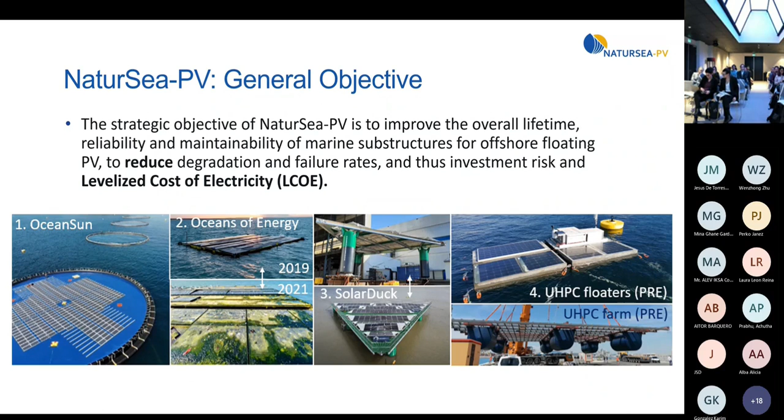And how are we going to do that? For that substructure, we rely on ultra high performance concrete because it has very good performance in terms of elasticity compared to regular concrete, in terms of durability, and also in terms of strength. It's a great material, but in this project we want to make it more ecological, reducing its carbon footprint, and if possible, also cheaper. Apart from that, we are going to work on the development of bio-based coatings to protect not just the concrete, but also the materials in the whole PV facility from fouling and corrosion. Not all the parts can be made of concrete, of course. Our colleague Esteban from RDC will give you more details about this in a few minutes.

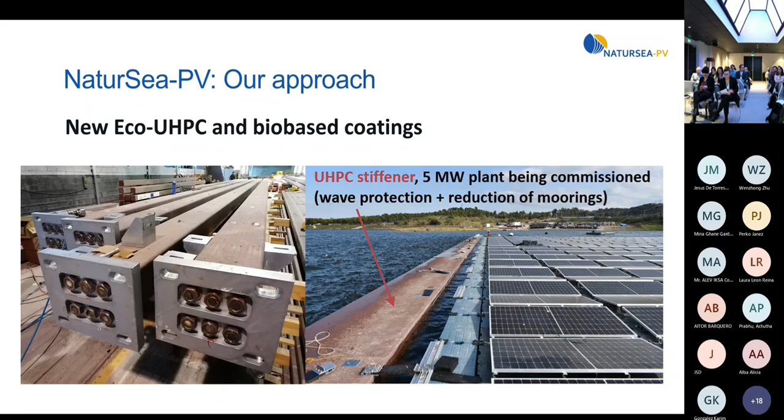Apart from that, we want to develop new predictive computational methods to predict the durability and the performance of the material and the whole structure under those harsh conditions. We will develop a mesoscale model that allows us to predict how chloride ingress will take place in this kind of materials. In the case of ultra high performance concrete, this is not known. So our colleague from Darmstadt will give more details.

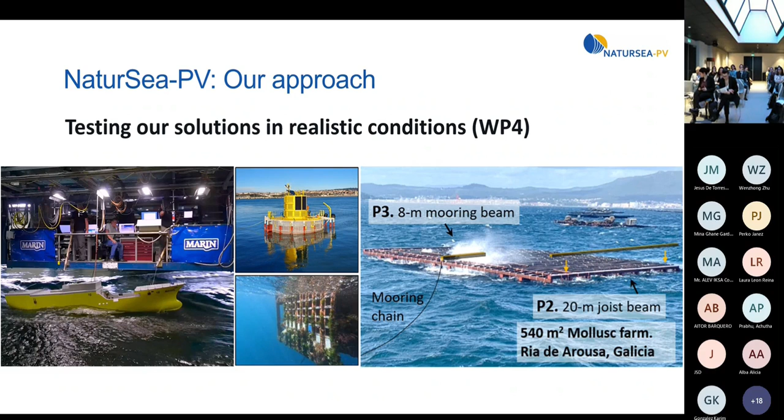And then, of course, it's very important to test all these solutions in realistic conditions. We cannot make the whole structure for real and put it in the sea. So we will test it, as you can see, in the facility of MARIN, that nice wave tank. Part of the materials will be tested in the sea, in the HarshLab. This yellow structure in the middle is placed on the coast in the Basque Country. It's a facility of Tecnalia. And of course, complete elements, the beams and the floaters, will also be tested in realistic conditions in the sea. The beams in Galicia and the floaters in the Basque Country.

But apart from those technical developments, it's also very important to assess the impact that all these solutions can have on the environment, on the socioeconomic activities that take place in the sea and so on. Because, of course, we all want green and cheap electricity. But probably none of us wants to have one of those facilities just in front of your favorite beach or something like that, or your fishing area. So how can we handle that?

Well, our colleagues from the University of Cork will work with different groups. This event, this co-creation event, also pursues dealing with those kinds of issues. And that's why we try to involve many people to participate in this event so that they can provide their opinion. Maybe these solutions are only for very specific locations. Maybe we should change our design somehow. So all that has to be assessed. Also, of course, the regulatory constraints. Do current regulations encourage or facilitate the development of this kind of structures, or do they hinder it? Our colleagues from Cork will study that and will give you more information in a few minutes.

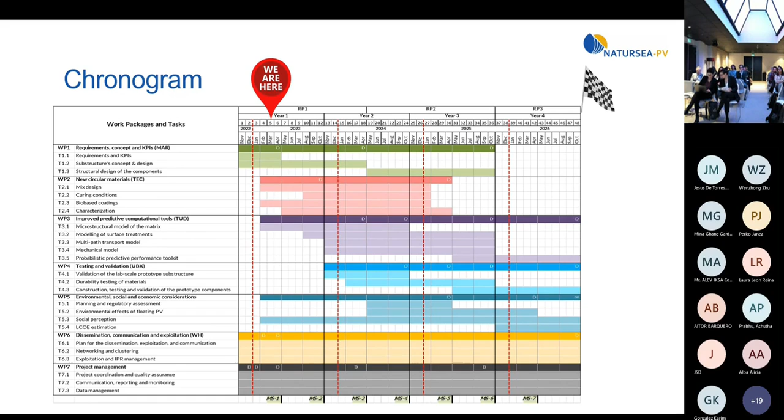And well, for doing all that, we have our NaturSea project. This project just began a few months ago in November, and it will last for 4 years. So we have plenty of work ahead, but we also have some time. I have to say that we have a great team composed of 11 institutions from 7 different countries. We have one additional institution from Portugal that will join us in a few weeks. We are signing the papers now. So I think that the project is very nice. We are going to get very interesting results and hopefully change a little bit Europe and the future of green energies in general. So I hope you all enjoy this event. This is everything from my side.

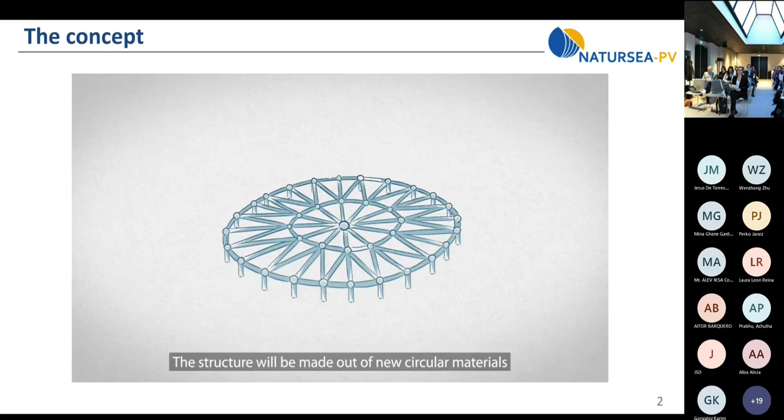In reality, they can become like 2 meters in diameter and they can carry a baby. You all have seen those lovely pictures, I guess. If you turn that upside down, then you see that it's actually composed out of girders. And these girders, they span a sheet. And well, what do you want to have if you design a floating solar plant? Basically, you want to span a lot of square meters or hectares with the least amount of materials. I think that is one of the main design drivers, creating hectares with the least amount of materials.

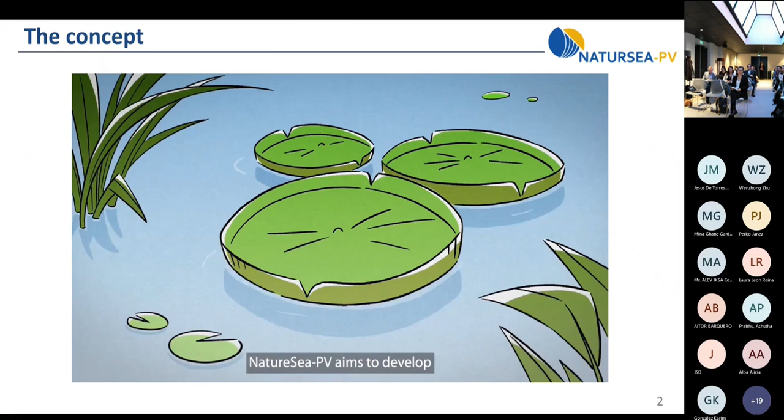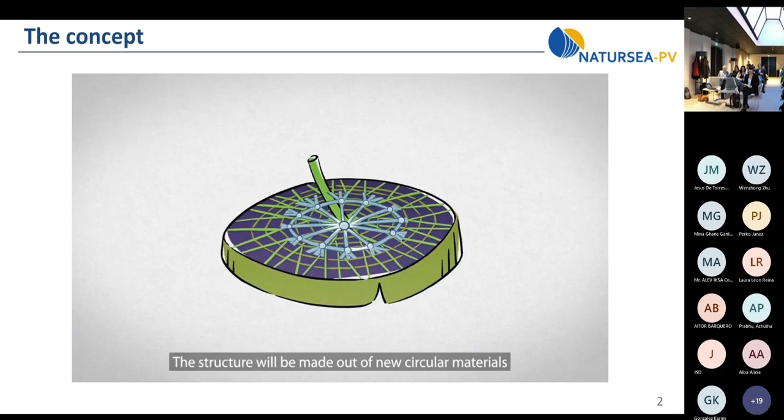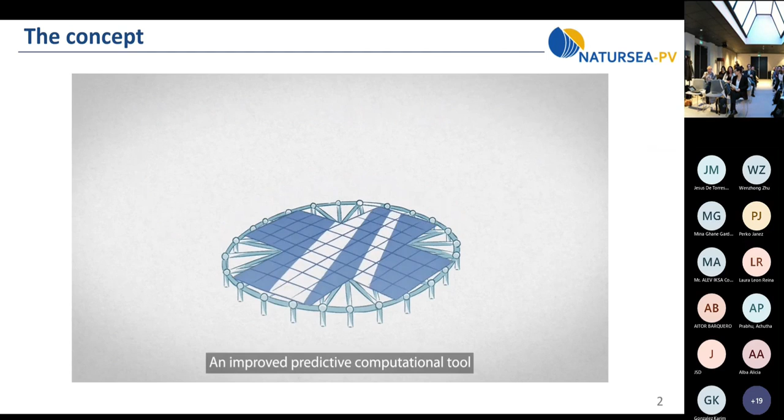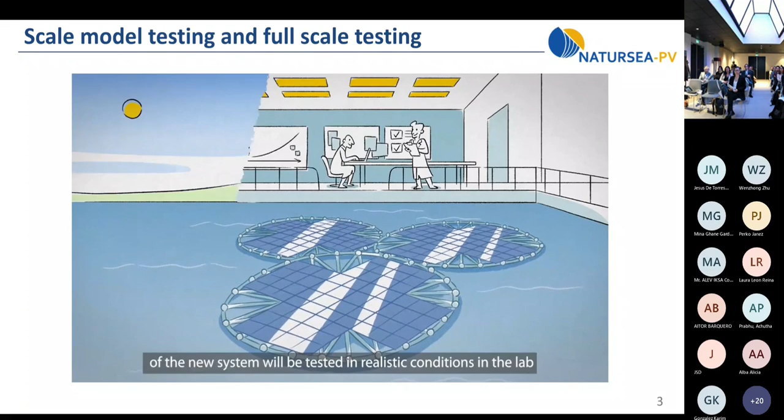And we were looking at how does nature do this. And these water lilies actually do that. Darwin made them such that they get as much sun as they can with their sheet using the least amount of girders possible. So that is basically the starting point of our concept. And then what we will be doing is first designing that with our numerical tools, and then later on test that at model scale in one of our model scale laboratories, and then also test part of it outside at sea.

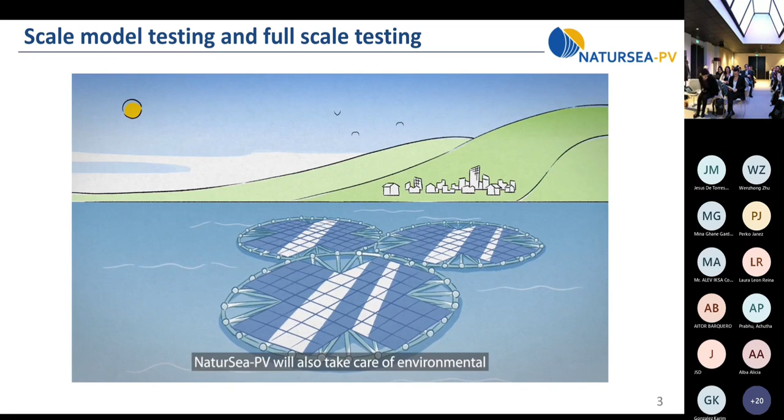So the design, the concept is completely new, and therefore it is at really low TRL at the moment. And in the next 3 years, we try to bring that a bit further on the TRL ladder. So here, this picture is just a starting point. So this is not the end design, but this is what we take from here and then analyze it and develop it further.

So the Lily concept consists of radial and tangential girders. And we anticipate to make these girders out of lightweight concrete, eco-friendly concrete, flexible concrete, ultra high performance concrete. So just like the water lily flexes with the water surface, this structure is also meant to flex with the waves. Flexible concrete elements. So these girders provide support to a lightweight sheet which spans the construction like an umbrella. And this sheet is still to be designed. So you have to see this as a low TRL starting point, which we will bring further. But yeah, it's a lightweight deck on top of a flexible concrete girder structure.

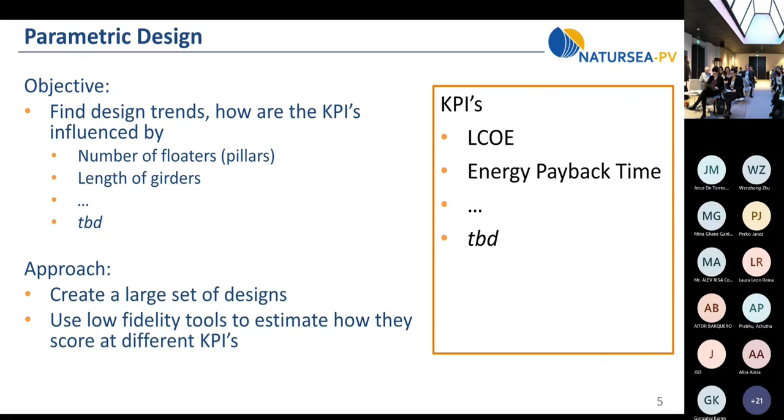So the approach is that we will create a large set of design variations, use low fidelity tools to estimate how they score at different KPIs, and then from there converge towards a solution, and on the way, of course, switch to higher fidelity tools, making better assessments. And in the end, we end up with the most high fidelity tool we have, which is the model test basin. So to make this a bit more concrete, not material concrete, but this is like a systematic design variation.

This is like a top view. Here we vary the amount of floaters and with it the amount of girders. You can make it having one outer circle or two or three. So here I call it rings and slices, which can have many varieties. And these are all design choices. And what we want to assess is the impact of these design choices on the durability, on stress levels, on the LCOE, and on the other KPIs that we have defined.

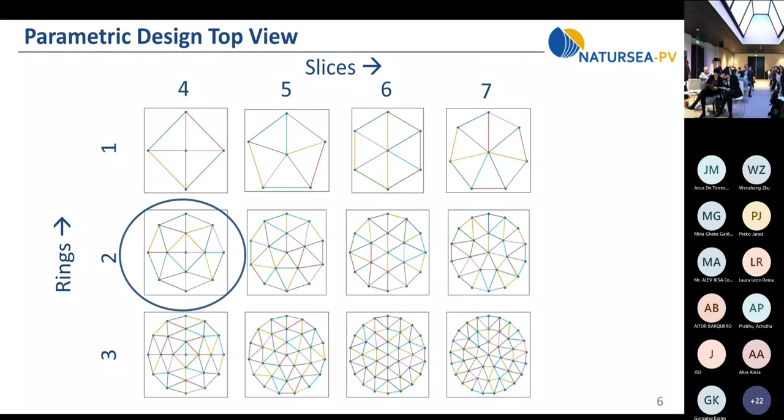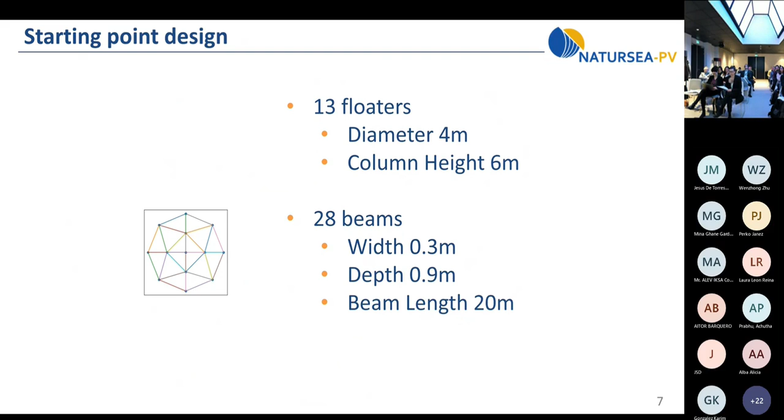This one will be our starting point of the design: 13 floaters, having a diameter of 4 meters and a height of 6 meters, of which about half will be below the water and the other half above the water. 28 beams standing on top of these columns, beams with a certain cross section and a certain length. That's the starting point. From there we will vary further and see how we can make this flexible, durable, and scoring well on our KPIs.

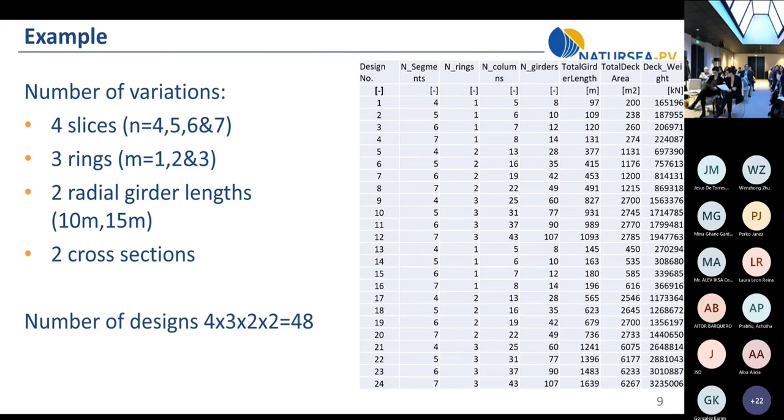We are going to vary a lot of parameters and see the effect of it. It's quite easy to end up with a large set of designs, and we are going to assess them all using low fidelity tools and then look for design trends and then switch to high fidelity.

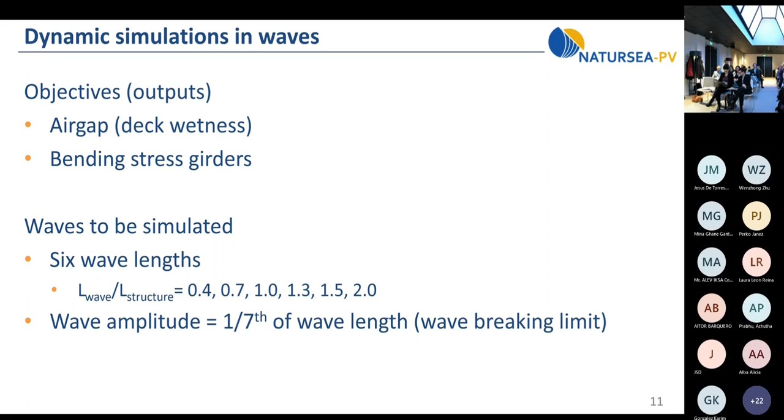So we will do this analysis using simulations. It will be dynamic simulations. We will define an LCOE function for all these designs, so calculating the cost of it, and also estimating all the other KPIs for all the designs we have. So there are a lot of calculations. They need to be simplified a bit because otherwise it's infeasible to assess many designs, but it's really meant as a screening. And at the point when we really make decisions, then it's time to look into it in more detail.

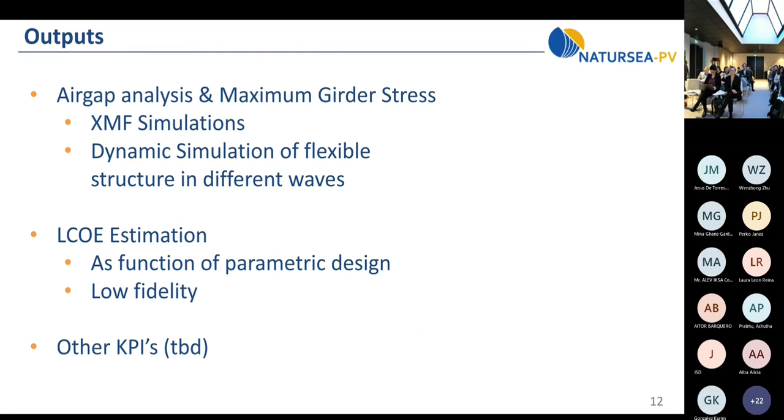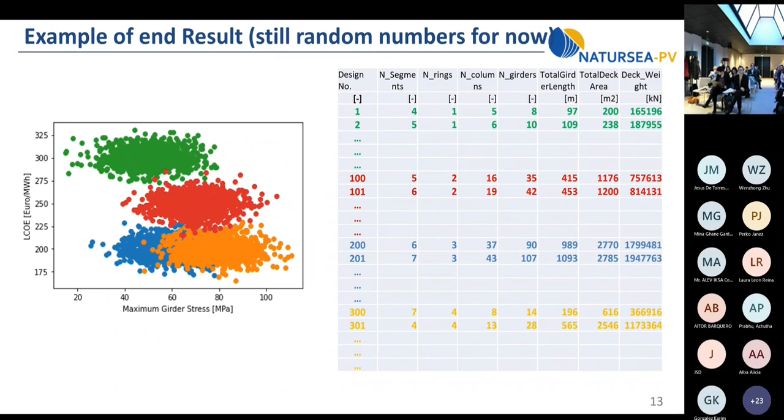And then really look for each design: okay, what is the LCOE, plotted here on the vertical axis? What will be the maximum girder stress due to the waves? And then really look at what is the best design, as a compromise needs to be sought between different KPIs. That is, in really short, the concept of NaturSea-PV.

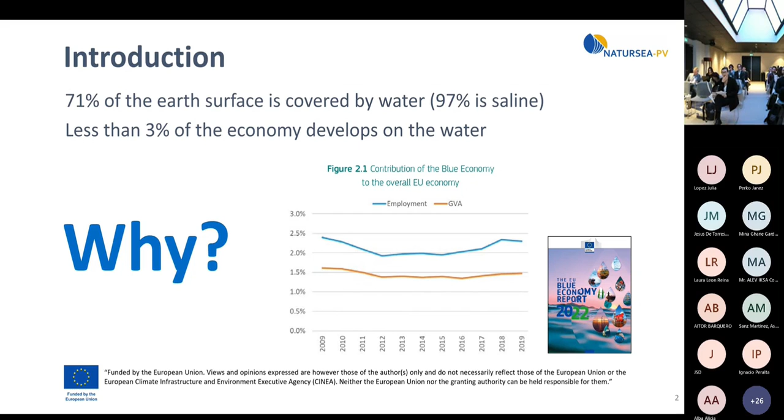The economy that develops on the water, or maybe on the ocean. And it is, well, maybe it's working, but we really didn't notice a significant increase. And one of the main reasons, at least from my point of view, is the harsh environment of the ocean. As it was already told here, the ocean water has chlorides, dynamic loads, fatigue with more than a million cycles per year, abrasion of the water and the elements in the water against the structures, extreme temperatures. Also, in many oceans we have less than 0 degrees, and also a costly and hard maintenance.

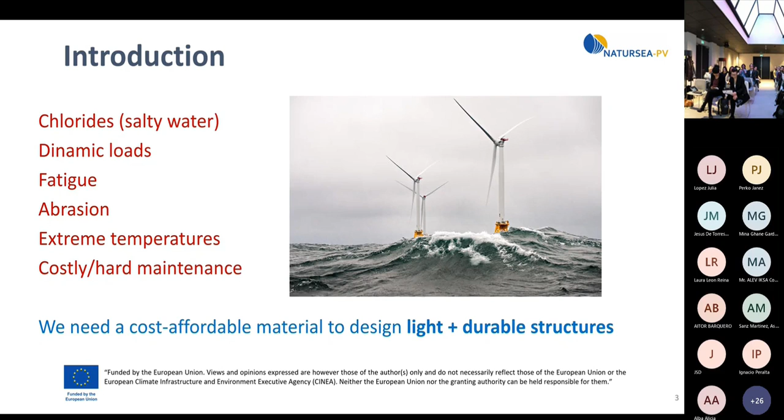So, in general, it's a key for the development of the blue economy to have lighter materials and more durable materials. Lighter because it costs a lot of money to bring the structures 10 miles or 20 or 50 miles from the coast. This means money. And more durable because we don't want to send people to do these expensive and risky activities of maintaining these structures. So having a lighter and durable structure and material is a key, but also to have a cost-affordable material, because the more expensive and the more technological the material is, the more difficult will be the development of this economy.

Up to now, one of the most promising materials we have experienced is ultra high performance concrete. This is a type of concrete which has a higher performance, not only higher strength, but higher performance in a wide sense. In the case of the sea, the most relevant is not that it has more compressive strength or flexural strength, but mainly the durability. The durability in uncracked state, which comes basically from the low water binder ratio and the high capacity of the binders, but also the durability in cracked state, because the fiber content is so high that when the material is cracking, you don't experience a large crack where the chlorides, the water and the oxygen will penetrate, but many micro cracks that are really more durable than a single macro crack.

Well, UHPC is a combination.

The laser doesn't work, but whatever.

It's a combination of 3 technologies of concrete developed in the last decades, which are, the laser, don't worry, okay, which are self-compacting concrete, fiber reinforced concrete, and high strength concrete. The combination of all these is UHPC, a technology that is really very wide depending on where you focus.

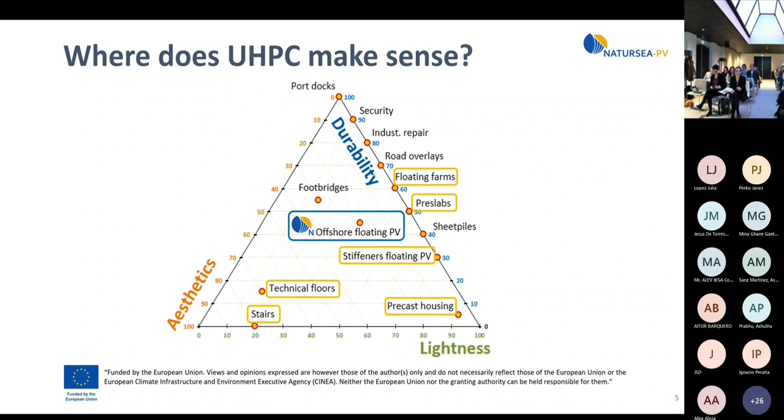Why? Because as I already said, a lighter structure is easier to make float. It's more economic to make it float, but it's also more durable. Most of these structures we have already made and installed in different situations. As you can see here, these are examples of successful structures made with UHPC, our design, and we also produce them. The first one and the last one are also patented solutions.

So if you want, we can start from this one. These are floating farms made of UHPC. We have already more than 30,000 square meters of these, and the maximum wave height of these structures is approximately 4 meters. Here, the key is that we are replacing the typical solutions that are made of wood. Wood is flexible, but the maintenance costs are very high. So our solution is a little bit more expensive from the first day, but very soon, after 5 or 6 years, it's already more economic due to the savings. This structure is exactly as flexible as a wooden structure.

If we go to the left structure, in this case, this is a perimetral pontoon made of UHPC to protect a floating solar system, which is composed of plastic floaters. In this case, the solution is competitive simply because the alternative with ordinary concrete is 4 times heavier. So 4 times more transportation, 4 times more cranes, and so on. So this was the most economic solution.

And in the central one, you can see some kind of nutshell, a 6 centimeter shell that is a pre-slab that later is filled with ordinary concrete. So this is an economic way to guarantee 100 years of durability in a port only with 6 centimeters of material. And later we put inside ordinary concrete that doesn't have these durability requirements because we already guarantee everything with a light structure that is really easy to commission. So here in the central one, the commissioning costs, the installing costs are much lower than other alternatives. And we have installed these because these are the most economic solutions from the first day or after 5 or 6 years.

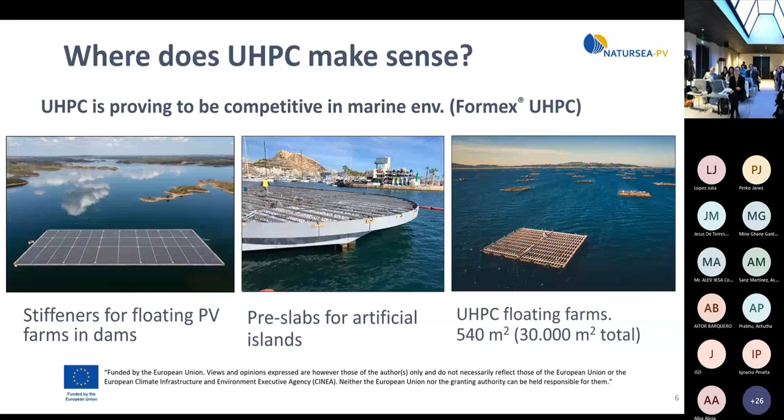Despite this technology and developments, there are still many challenges and limitations. I generally say that UHPC is like ginger because we all know that it's very good, but we don't know how to use it or where to use it. As I was telling, I think that the main barrier is that engineers really do not know in which field to use it. And also many clients don't know that they are potential clients. They need UHPC, but they don't know it. So as they don't know it, they don't call us. So this is the problem. We need to shape the market with projects like NaturSea, to show people that UHPC can really be used in some sectors where no one imagined that.

One of the main keys is that the material is expensive. Okay, expensive is a relative word. It's expensive if you make the same designs, but if you optimize the element to understand that you can use less material and transport less material, then costs are relative. The regulatory frame is still a significant barrier because we don't have so many norms yet in the countries, and the lack of success case stories. But it's true that every day we have more examples of successful uses of UHPC.

Well, we are facing many of these barriers and limitations with the NaturSea project. I will not speak about the Lily because they already explained a lot. But the thing is that in this project, we will design a large substructure of UHPC, and at the same time optimize the costs of UHPC and its sustainability. And these two tasks are really related because the design of the structure is directly related to the capacity and properties of the material. We still don't know if the most sustainable solution is a UHPC with a high carbon footprint but using a low amount, or a combination of a weaker UHPC using more material. This is the main analysis in work package 1 and work package 2.

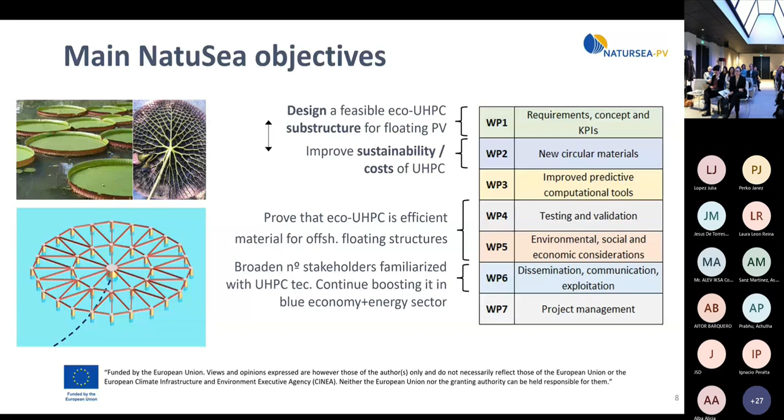In work package 4 and 5, we will prove that these structures in TRL 4 and 5 are really working after 12 or 18 months. We will prove if these structures are really useful to our goals. And in work package 6, we will do something that I think we are missing nowadays, which is to broaden the number of stakeholders, the people that really know what is being done with UHPC. We need to shape this market for future sales.

So as I was telling, there are tasks in this project specifically focused on UHPC, which are to develop an eco-UHPC using eco-cements, recycled fibers, recycled aggregates possibly, and also focusing on the concept of circularity. We will also explore in our factory a new curing system to boost these properties of the eco-UHPC.

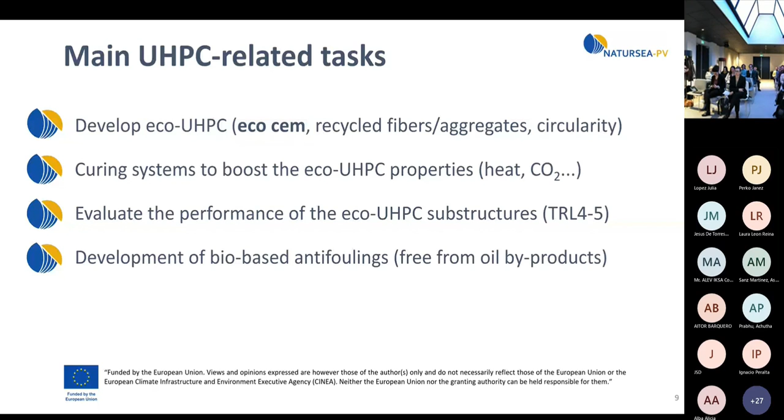We will evaluate, as I already told, the performance of eco-UHPC at TRL 4 or 5 with elements such as these rings and floaters that Otto mentioned. And we will develop bio-based antifoulants to protect these structures from fouling. And this is mainly the presentation I wanted to do. If you have questions.

So I just want to check the question that was asked before, because I think that you can answer. Okay, there are two questions. So the first one by Mr. Alev Iksa. Oh, okay, another one. Okay, sorry, one moment. Lots of questions. We are very happy about it.

Okay, so the first one: what is the unit weight of the concrete? As it is a UHPC, what is the strength target for your concrete? And what sort of reinforcement is used in the concrete? Well, all these questions are relative. UHPCs can have binder contents between 500 and 1,000 kilos per cubic meter. Please don't move because I am reading the questions. So it's relative. Obviously, it's higher than in a traditional concrete, but you are using lower volumes of material and they last long.

The strength target of our concrete. In our case, as I already mentioned, I don't know how much we can afford to decrease the performance of the concrete, because this depends on the equilibrium with sustainability. Nowadays, the UHPC we produce has 160, 165 megapascals on average after 28 days and without steam curing. The reinforcement used: normally all these structures are pre-stressed or post-tensioned, but normally pre-stressed. The next question, I think, is the same.

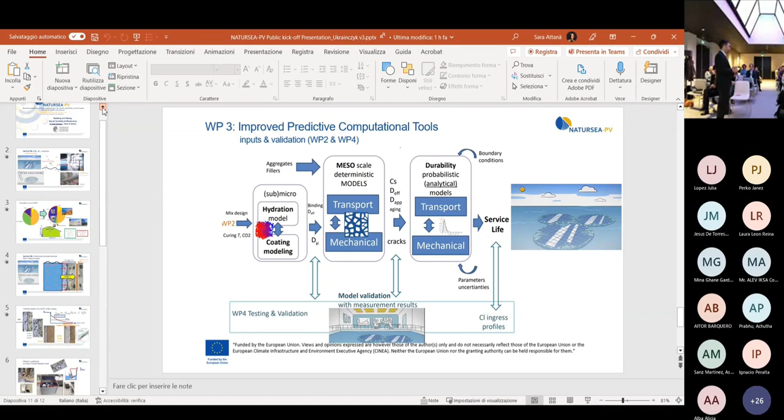Interesting. Sorry, because I don't know if from home they are listening. So I come here with the microphone. Do you want to? Yeah. Okay. Nadia, you're Nadia, right?

Yeah. Nadia asked if the beams are 40 meters long. No, we don't know the length of the beams. I'm explaining what's the maximum length that we more or less can afford in our precast factory. So if we go beyond, we know that we need to produce the element in the port or next to the port, which means a totally different logistic. 40 meters is okay because with two beams you could span 80 meters, which is more or less the first design.

Many thanks, Esteban. Now I give the floor to the Technical University of Darmstadt. Our project partner is Neven Ukrainczyk. I hope that I spell your name and surname in the right way. So he will talk about modeling and testing, and so about durability and maintenance. So Neven, the stage is yours. Yeah, thank you.

Yeah, I have the task to talk about the modeling and testing. So it's part of work package 3, predictive modeling tool. And our group is leading this work package, and it's chaired by Professor Koenders. I also got inspired by a very nice video. Thank you for this. So this is our dream. I also believe that UHPC is the right material for this kind of application.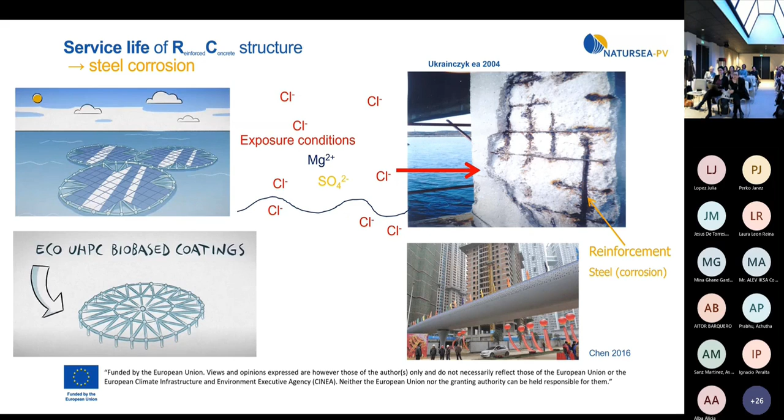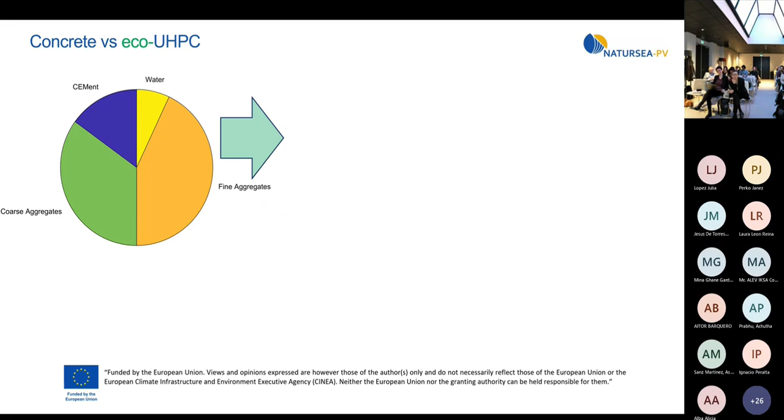Here is one example that UHPC is already really reality. Maybe a nicer picture from Esteban I would use next time. But the Chinese are also ahead in UHPC applications. And we heard that our challenge is actually not only UHPC, but also to make eco UHPC. Because here you can see normal concrete, but when you compare it to UHPC, we don't have the coarse aggregates, and as Esteban just told, most of the volume, here I show it by mass, most of the amount is fine aggregates.

So this is also an idea in the proposal, that in the project we actually replace the aggregates, so we can use recycled fine aggregates, and the next step is the cement, to make eco-cement, because the cement has the highest CO2 production. So we really need to reduce the CO2 footprint from the binder, and this is of course done by supplementary cementitious materials. So we will explore different supplementary cementitious materials, and then we have fiber and a lot of superplasticizers to make it flowable.

And here you can see this is really increasing the footprint of the UHPC, also the price, the CO2 footprint, because we have a lot of cement. But as Esteban told you, because we use less concrete, the bars will be thinner. This is one argument that this is still a more sustainable solution, which needs to be checked by LCA, of course. But another very important argument is that the durability is increased, and you have less maintenance costs, you don't need to replace covers or do maintenance even in 15 to 20 years.

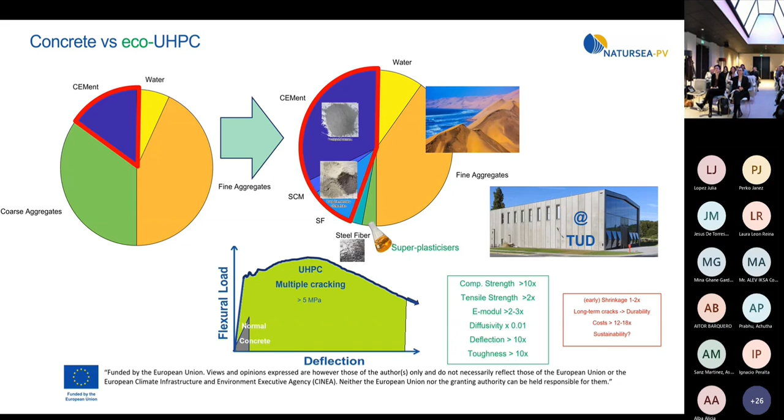Another drawback is early age shrinkage and also the cost, which we heard, but of course, if this is adjustable, then the costs should not be a problem. We also heard that from Esteban.

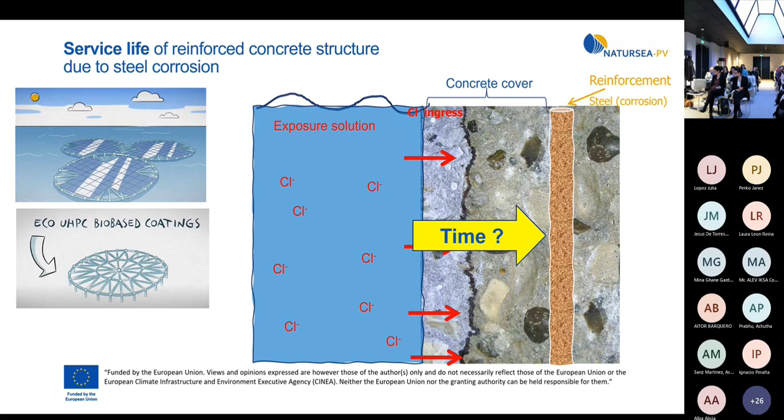So now I will talk about why chloride ingress. This is the cross section and we have a rebar here. These are the chlorides, they diffuse or ingress. There are more mechanisms involved. So this is the concrete cover, which is the main cover responsible for the durability, that passivates the steel, because concrete has a high pH and this passivates the steel. But here you can see the chlorides. If you spray it with silver, then you nicely see the penetration depth. And when they reach the steel, they activate the corrosion.

So for this, we have different tests. This is one, for example, a rapid chloride migration test, which is accelerated by voltage, or we could use just natural diffusion tests. When you make a cross section, you can see it in the concrete. This student from Delft did it on normal concrete and slag concrete, and they found that because the microstructure of the binder is much denser, the interfacial transition zones between the aggregates and the paste binder are more porous, and you can see how the path actually follows these interfacial transition zones.

Now we don't have the big aggregates, but still we have the transition zones. So this is how it would look for the mortar, but it's not UHPC, it's just normal mortar. And here you can see it for the paste, so just the binder. And actually we can model it by the diffusion model. This is just a simplified way. But the diffusion coefficient is one of the key performance indicators, because it shows how long the chlorides take to reach the reinforcement steel.

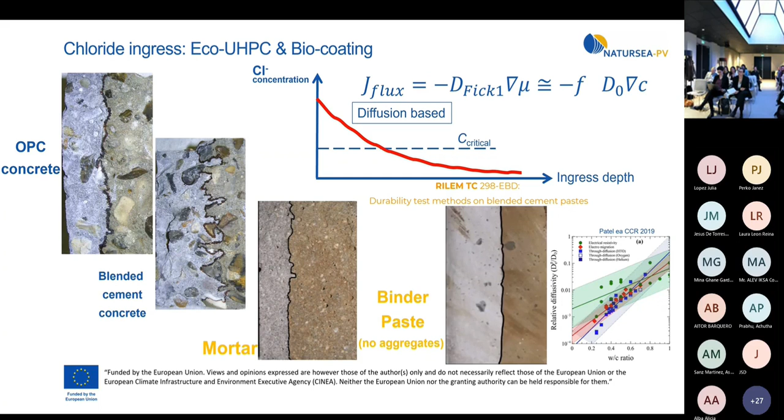But this figure is just for normal Portland cement, so we need more data on blended cements. This is why there is this RILEM technical committee, why we are reviewing what is the effect of supplementary materials, and we are doing that on blended cement paste because it gives a much faster way than doing measurements on concrete including the aggregates. Of course, aggregates are important, but just to classify the materials, which SCMs are good, and see how they have the durability, as a first step it is easier to do it on the paste directly.

Here is how the method looks in TU Darmstadt in our laboratory. We first drill the cores, and this is called a rapid chloride migration test. It's a standard test, and we use voltage because otherwise for natural diffusion you need to wait for a long time. So in the standard we use voltage to speed up the chlorides, because chlorides are negatively charged, so they are attracted by the anode. Here we have the solution of chlorides in one compartment. The chlorides go in, that's why you can already see here the penetration zone, the ingress depth, and on the other side is sodium hydroxide solution just to keep the pH.

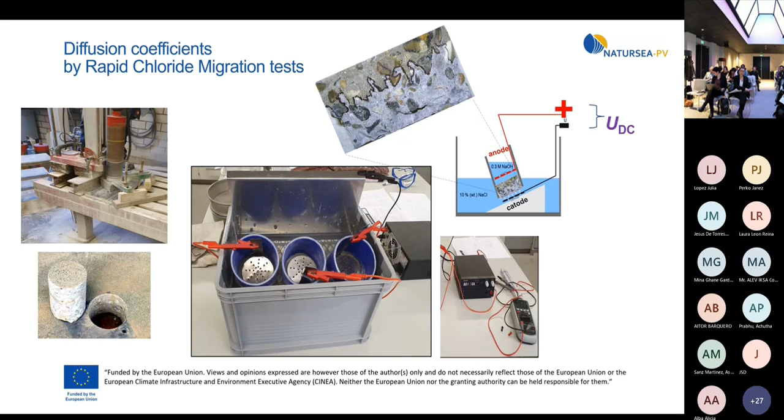Now, work package 3, the improved predictive computational tools. Of course, we have inputs from work package 2, which directly gives us the mix design, curing conditions, bio-based coatings, what type of materials, so all the inputs from the material types, mix designs and characterization of the materials. Work package 4 is on testing, so it will also give us inputs, but also tells us how to validate our models.

In our work package for the improved predictive computational tools, we have 5 different levels. Actually, we follow the multi-scale approach. So first we do the binder, that's the microstructure of the binder matrix. We are using thermodynamic modeling to predict the phase assemblage and the hydration, how it develops the pore structure. Then we have the modeling of the surface treatments. Then we have a mesoscale model, which I will show later, where we include explicitly the aggregates and the interfacial transition zone.

We also need to have the mechanical model, because mechanical loads produce cracks that directly influence the durability. And at the end, because these are quite sophisticated, high fidelity scientific tools, we want the engineering tool, and this will be a probabilistic predictive performance toolkit, which will predict the chloride ingress from a probabilistic engineering point of view, but also taking inputs from the previous more advanced tools. With new materials, we need different inputs for this kind of standard tools. And we also want to include in this predictive tool not only chloride ingress, but also coupling with the mechanical model. But they will be analytical models, simplified for engineering purposes.

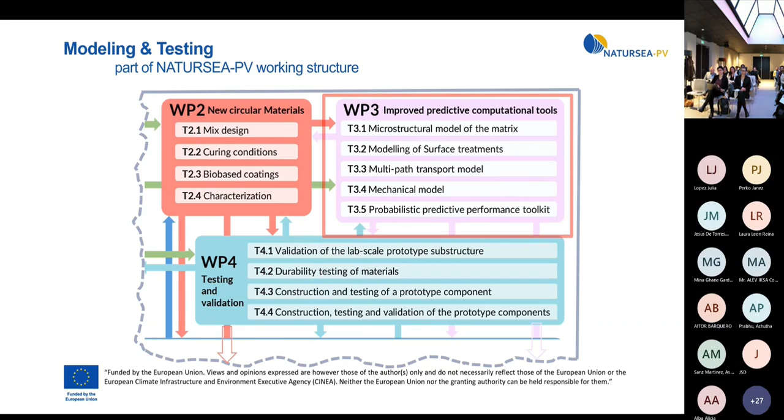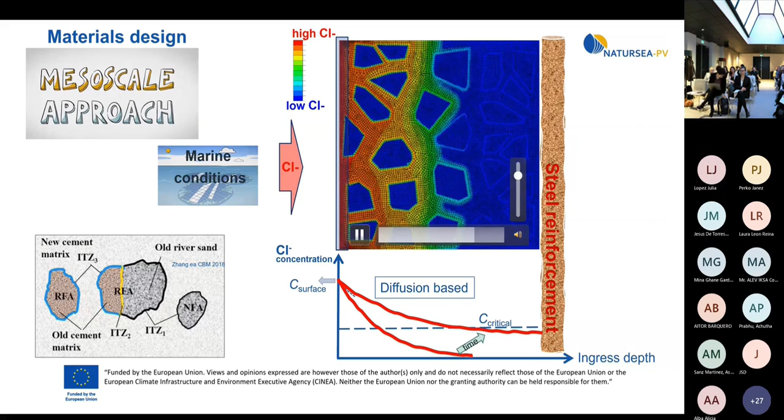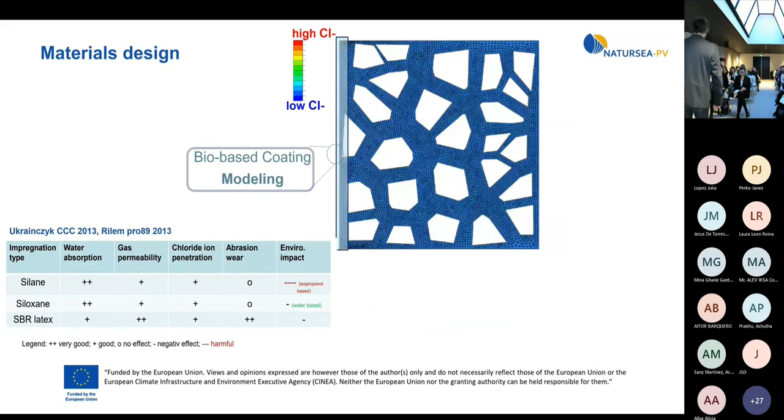And I did also some work in coatings, but we used styrene butadiene latex, which is actually, I would even argue, not so sustainable. But in the US they use it as a common solution for roads and bridges. When they have to remove the cover and repair, they mix it with a certain percentage of latex or just spray it. So this is the coating.

During my studies, we actually had a home in a garage. We were using this kind of, we were selling, because my father was putting this in the engineering practice, we had a company that was selling this kind of additives for concrete.

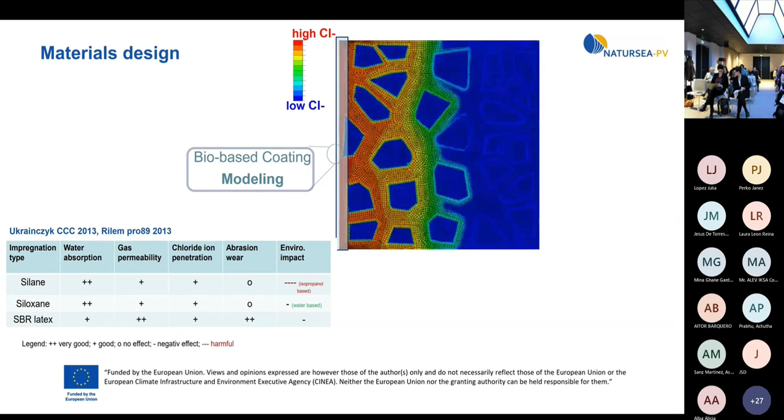And now the paste: here we have the thermodynamic modeling, so that we can predict how the supplementary cementitious materials, how the eco-cements, what is the best eco-cement solution, because we need a microstructure to replace the cement. We can use this very powerfully with thermodynamic modeling, because then we can predict the phase assemblage, we know the porosity, we know which kind of phases are forming.

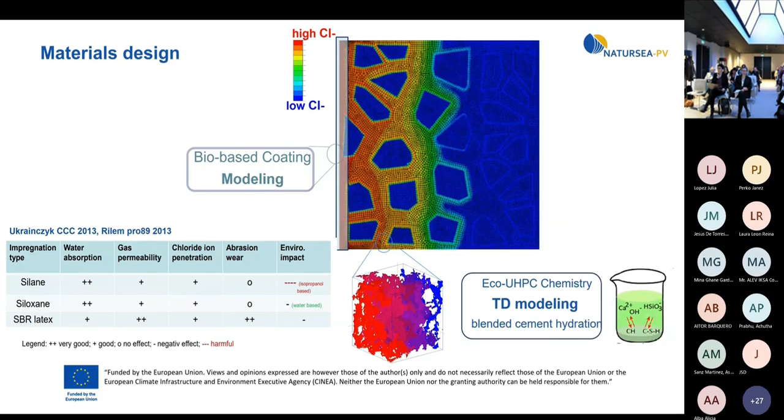And of course, for UHPC, for the performance, I would say it's all about the packing density. So we need to pack the aggregates and also cement particles and fillers and supplementary cementitious materials. But it's also the chemistry, and this all influences the workability, rheology, flexibility, strength, and also durability.

Here I found one from the literature, Thomas. This is a high performance concrete, and here we see the chloride ingress for the ultra high performance concrete, and you can see really how much less chlorides are ingressing in ultra high performance concrete.

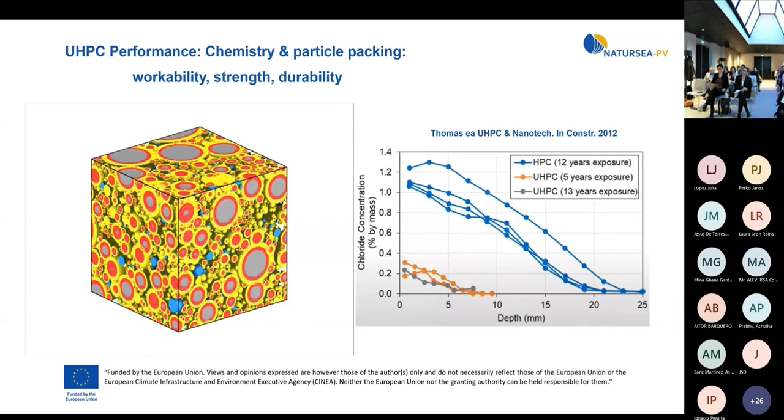And this is my last slide, my conclusion. For the KPIs, also very important. I summarize this. So we have the inputs for the mix design and curing conditions. This is the modeling part, and here we want to validate parameters in different steps, at different scales. So it's a multi-scale approach, and we validate with measurements and results.

So first, here we do the base, the binder, for the micro level, let's say. For this, we have two tasks on hydration modeling and coating modeling to see how the coating also interferes with the concrete. And then this is the meso scale. We need to explicitly model the aggregates and ITZs, the interfacial transition zones, the preferential pathways that the chlorides take. And for this we need input for the diffusivity of the binder.

And here we have the output diffusivity of the mortar, and this should be tested. That way we can validate and calibrate our models. And then later we can also test it in real conditions. For this we will use a probabilistic approach. Because we will also have parameter uncertainty and the real boundary conditions, with the probabilistic approach we can take into account the uncertainties and predict the durability of the structure.

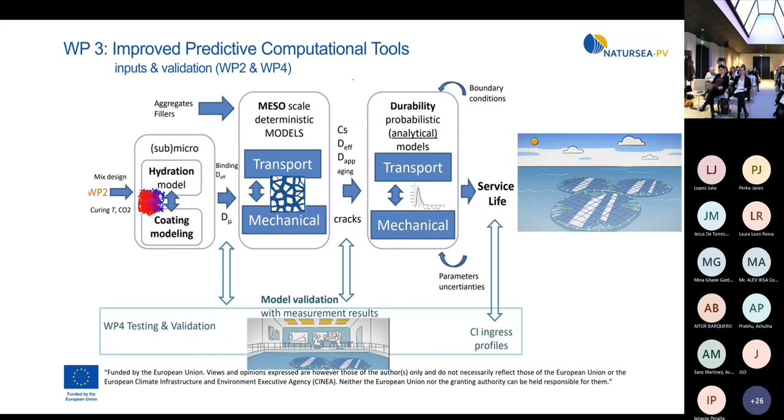Thanks, Steven. We have a question from online. Sorry, I was trying to see the question. Maybe this one? No? To reduce the risk of corrosion, this was already answered, maybe? Or not? Partly, yes.

And this question: to reduce the risk of corrosion of steel fibers and the thickness of the structure, have you considered using other fibers, for example carbon or polymer fiber, or using textile reinforced concrete? Maybe this is a question for Esteban. Sorry, because of the microphone.

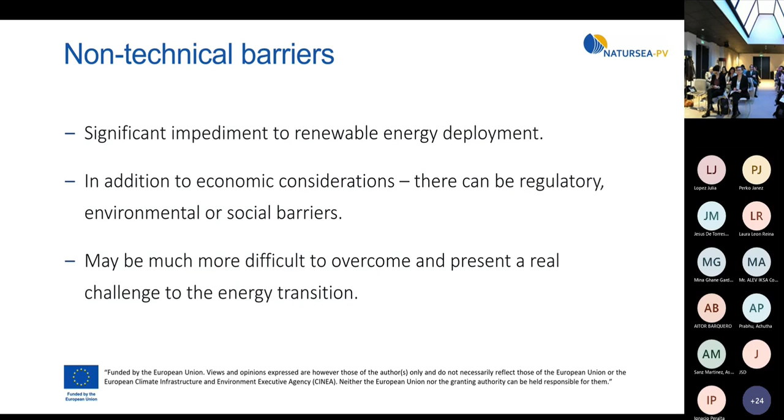In addition to the economic considerations, which are obviously top of everyone's mind, and we've seen already how the levelized cost of energy is going to be taken into account in this design factor, there can be regulatory, environmental, and social barriers. And these are often far more difficult to overcome. I have a natural science background myself, I am a scientist, but at least with a science problem, you know what the problem is. People are far more complex. It's often far more difficult to even define what the problem is.

So within this project, NaturSea-PV, we're going to look at three aspects of non-technical barriers. We look at planning and regulatory assessment. We'll consider the spatial requirements of floating PV and ask how this might impact positively or negatively on other sea uses and activities. Very often we overlook that there are other people involved in all of this, and simply putting a big installation in the sea is going to impact many other uses, some economic, some social, some recreational.

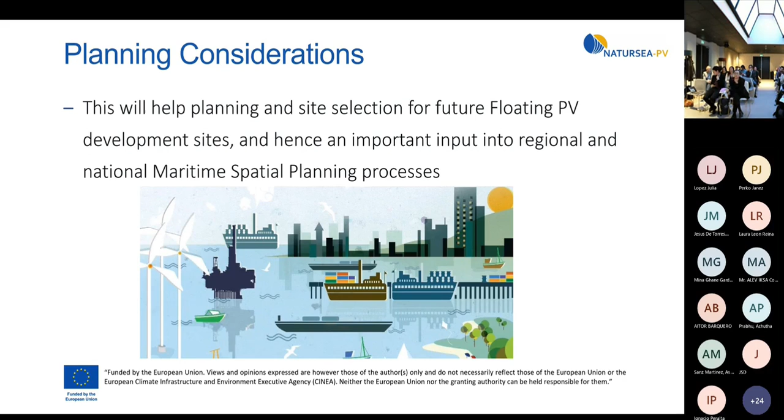So this will help planning and site selection for future floating PV deployment, and hence it's an important input into regional and national maritime spatial planning processes, and this is going to be a key part of this work, looking at the maritime spatial planning processes.

So the task is going to come up with a hypothetical spatial area for a commercial scale project. Consider other relevant siting conditions: water depths, distance to shore, access, navigation restrictions, water contact footprint, and overall area of influence. Regulations and standards related to construction, transport, and deployment will also be taken into account. So this work will take part in the second part of the project. So it's after the initial designs come through, and it really is part of the testing, I suppose, or the

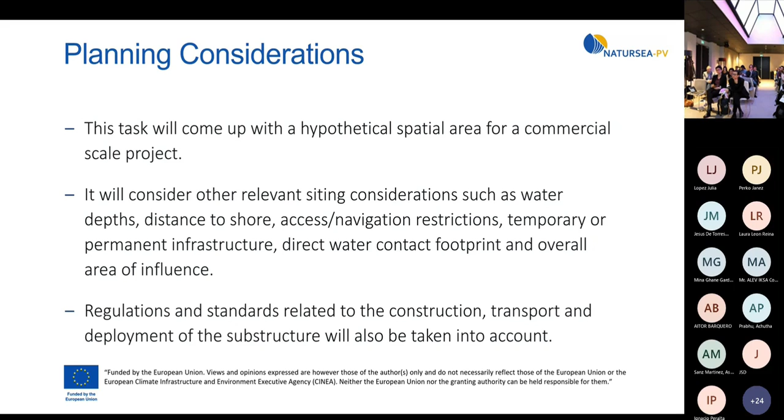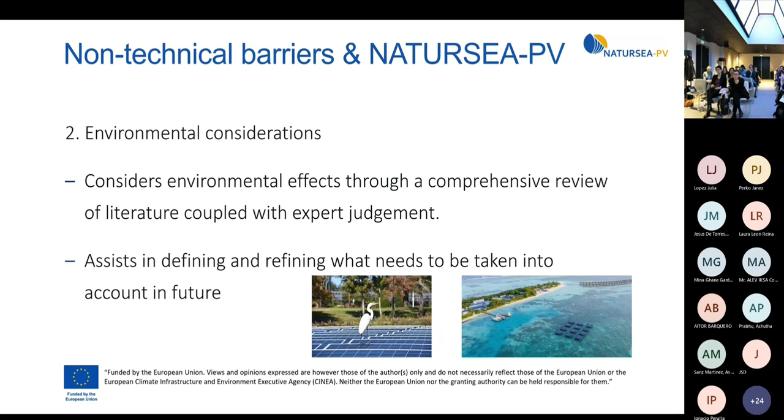verification part of it. Second one is environmental considerations, and this will consider environmental impacts through a comprehensive review of literature coupled with expert judgment, assisting in defining and refining what needs to be taken into account in the future. So the analysis of broader marine law and policy will also be included, and examples of the Marine Strategy Framework Directive cover such things as water quality, introduction of underwater noise is going to be an issue, nature conservation directives to protect certain habitats and species will all be taken into account.

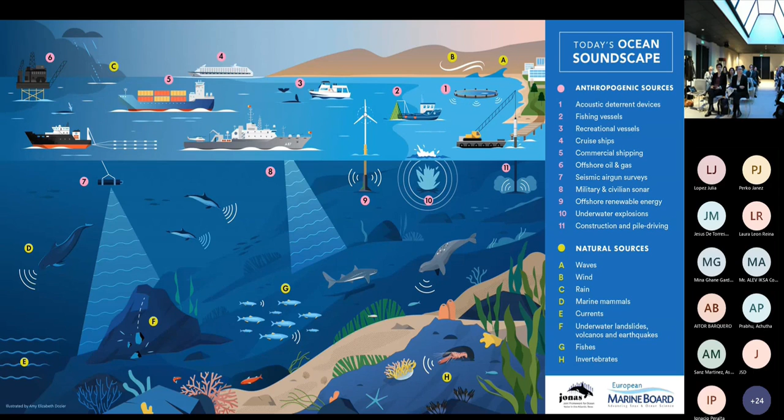And this noise and the impact of deploying structures in the sea and what impact that has on what's known as the soundscape of the marine environment is going to be key to this as well, how that would play into it. And a particular emphasis will also be placed on potential positive aspects of deploying some structures. So very often what we see is when you deploy a structure, it acts almost as an area of conservation, and that sea life can be somewhat protected, for example, from fisheries and so forth. And these positive aspects will also be an important consideration in the life cycle assessment.

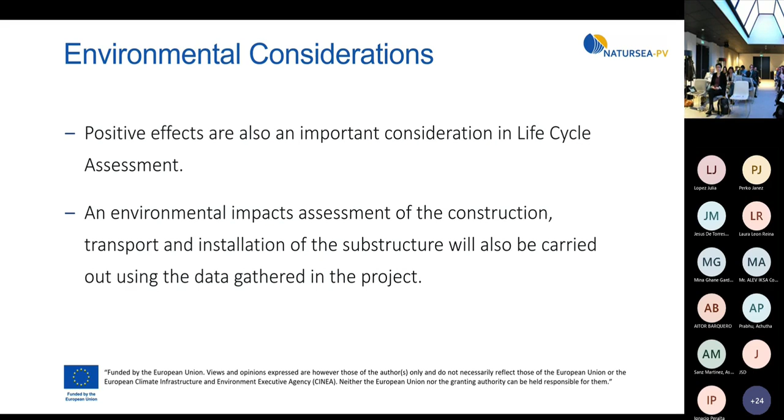And we've seen earlier that there's some talk about the trade-offs of the thickness of the concrete versus the carbon, resulting, in fact, in an overall improvement of greenhouse gas performance of the material. So an environmental impact assessment of the construction, transport, installation will also be carried out using data gathered in the project. Again, this is going to be later in the project once the initial designs come up.

This is just the overall scope of the approach to LCA, and I'm sure that you're all familiar with this. But the key thing here is the goal and scope. So how you establish the goal and scope of any life cycle assessment is going to be key to what you actually find out at the end.

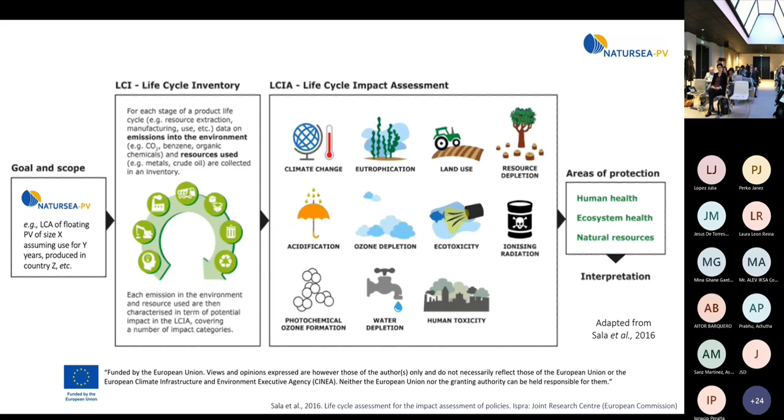So in deploying any type of infrastructure, we always look for acceptance. Look for the local communities to accept what's happening there. But this acceptance really often implies a kind of passive acquiescence. We know best. We're going to tell you what we want to do here. This is why you should agree. Now agree. And if you don't agree, then something's wrong with you. And it's usually more concerned with advocacy, as I say, rather than the decision-making process.

And it's a so-called DAD model. Those of you who are dads in the audience will like this: it's decide, announce, defend. But very often what happens, it's actually DADA. Decide, announce, defend, abandon. Because you can't get acceptance, you can't get permits, and there's opposition, and very often this will slow down projects, if not completely cause them to be abandoned.

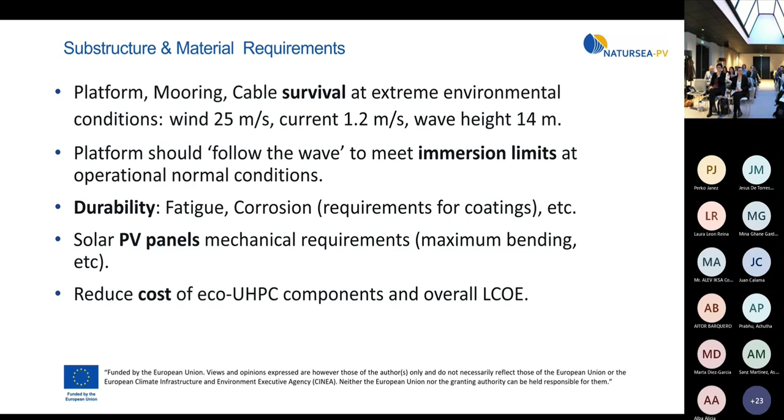One important thing is we are not researching PV panels. We are considering traditional commercial PV panels, which normally cannot bend. So if we are designing the beams to be able to bend, we have to make sure that the PV panels are not bending, because they are normally quite rigid. So this is a requirement for the connection between the panels and the beams. And of course, the main requirement always is to reduce the cost, reduce the levelized cost of electricity.

One important question here is whether increasing the eco properties compromises the mechanical properties. We don't know this, or we don't know to what extent. So we need to analyze this compromise: how eco can we be without compromising too much the mechanical properties. Not all parameters are quantitative, we also have some qualitative requirements.

Most important is that platform accessibility is important for maintenance operations. You know how expensive it is to do anything in an offshore environment. So we need to make the platform as accessible as possible, and also allow easy deployment for installation and decommissioning. So we need to make the platform as easy to deploy as possible, because everything is quite expensive there.

Modular design: we're focusing on the one lily concept, but maybe we can go further, joining different lilies. So maybe modular design is important as a requirement. And finally, for the coating, we have set the bio content over 80%. We will see if this 80% is compatible with the properties of the coating.

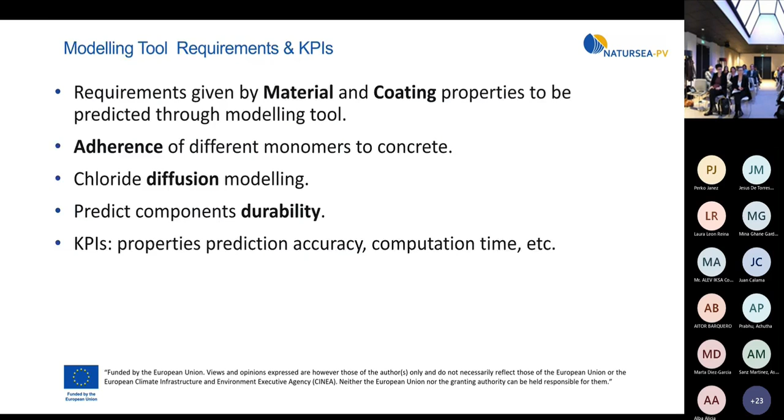Finally, as Neil said before, we have not only technical restrictions, but also some environmental and socio-economic aspects that we need to consider. Normally, environmental restrictions are related to the impact on the ecosystems, on animals, on the seabed also, because we are not only on the surface, we are also on the seabed. We are putting anchors, mooring systems, we have the installation, the decommissioning, so all this can affect the seabed as well. So we need to consider all these aspects, even the influence on local currents and waves. Normally this is not a critical aspect, but it has to be considered as well.

And the influence on socioeconomic activities. For example, this is incompatible with fishing or with some sea sports or other activities. As Neil said before, we are not focusing on a real location, but in a generic way we have to consider these generic restrictions from the environmental and socioeconomic aspect.

And this is a quick summary of what we are doing in requirements and KPIs. This is an ongoing task. The plan is to have this finished by the end of April, so there should be a public deliverable in May. And we're open to proposals, suggestions, because we have considered some generic aspects, but for sure there are many others, and people online can give us some valuable input, so we will be very happy to hear you. The questionnaire to contribute.

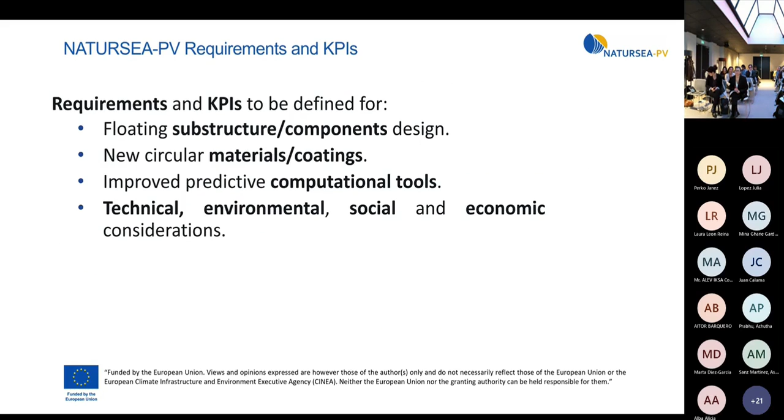Yeah, thank you. One of the main requirements somewhere here is this qualitative requirement: one is to make the platform as accessible as possible for the maintenance. And of course, we have to quantify this. And also we have included in the economic parameters somewhere here parameters like mean time between failures, these kind of things, to estimate also the cost of the operations.

So we are estimating the cost of the full life cycle, and part of it is the maintenance. So we will have to define here more specific parameters to quantify the cost of these operations. You know, in offshore environment, everything is expensive. So we need to reduce the number of operations, and for each operation, we have to reduce the cost of the accessibility. So yes, for sure, we have to consider the operational maintenance here as well. How can we quantify this? Not always easy.

Thank you. So we will proceed with the roundtable. Yeah, we need a few minutes to prepare this. Okay. Can we start? Yep. And now if there is online. Is there a question? Okay, sorry.

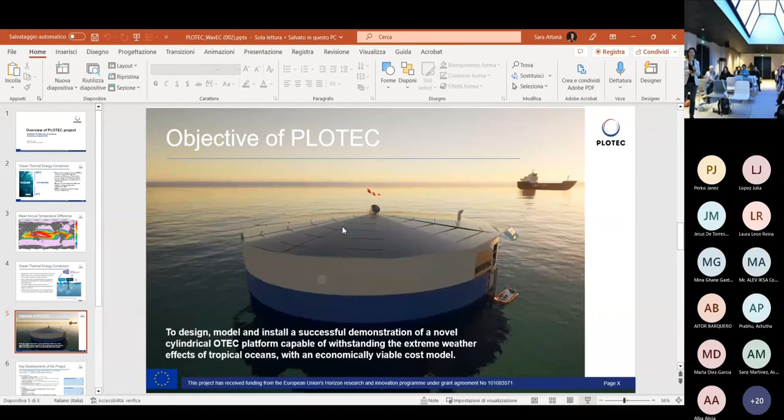Sorry, Anna, because from home they told me that they cannot see the presentation. Okay. So everything was okay since now, and I know that something happens. Should be wrong, so sorry for that. Okay. Now I think you can see it. Please confirm it. Yes, we see it now. Thank you. Perfect. Many thanks.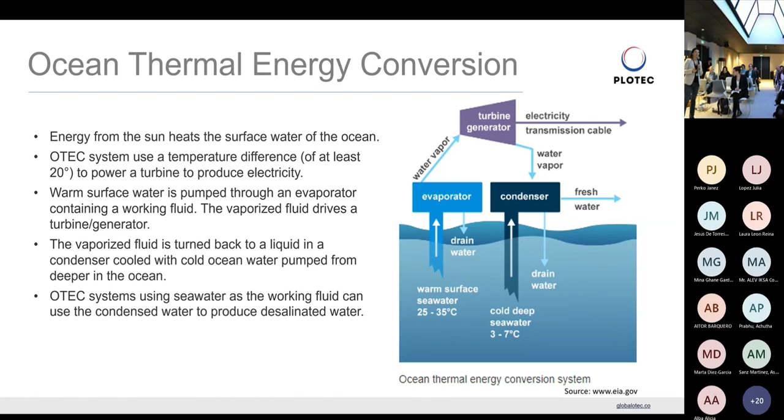So here I'm showing the design that is planned for this OTEC. So I just go to the previous slide to show that this evaporator and condenser, these are standard equipments. It's not the key point of our project. Our project will focus on the design of the structure where these equipments will be placed, because what we have so far is OTEC plants in the shoreline, and OTEC plants in the offshore, where it's more easy to have a deep pipe to collect the cold water. This is the key challenge of our project, is to go to the offshore.

And to go to the offshore, this is the design that is being planned by the developer, which is a UK company called Global OTEC. So the objective is to design, to model, and to install this successful demonstration of a novel cylindrical OTEC platform that can withstand the extreme weather effects of tropical oceans and be economically viable. It's not seen here, but below this cylindrical platform is where we have the long pipe to deep water.

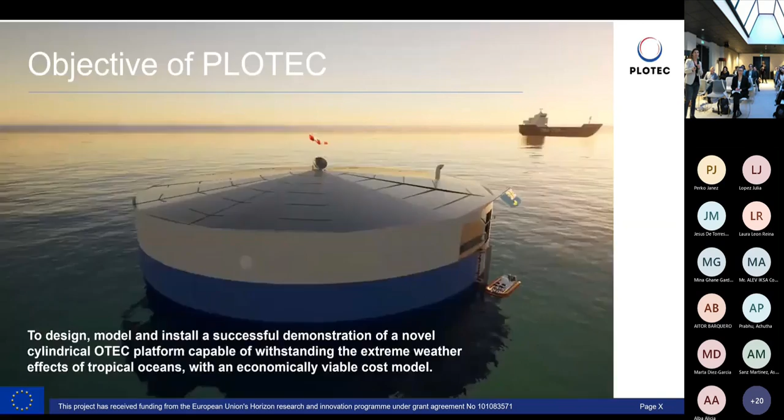This plant will be demonstrated at PLOCAN test facility offshore Gran Canaria, and these are the key developments. So it's to build and to test a cylindrical floating structure. This is the innovative component. Also to have a cold water pipe to transport the deep sea water from 600 to 1,000 meters depth through a large diameter pipe.

Then the gimbal connection. And this gimbal connection is to connect the long pipe to the floating structure. It's also an innovative mechanical joint because it has to be sealed. It has to prevent, in the joint between the long pipe and the floating structure, the entry of warm water at the surface. So it's a very innovative component. And also the computational model development, to model the dynamic movement of the floating OTEC and the interaction with this pipe, and also the additional effects of the water movement inside the pipe.

So the cylindrical platform, Global OTEC believes that this novel design could prevent the need for more expensive and conventional mooring systems in the harsh environments. It's what we aim to demonstrate in this project, and also the material that will be used to fabricate the cold water pipe, which is a high-density polyethylene material. And this material may be the favorite material due to its low cost, installability, and robustness. But we will compare in this project other materials like concrete, steel, carbon fiber, and fiberglass, and also the material that we showed this morning that you are using in your project. So this is also part of the research of the project.

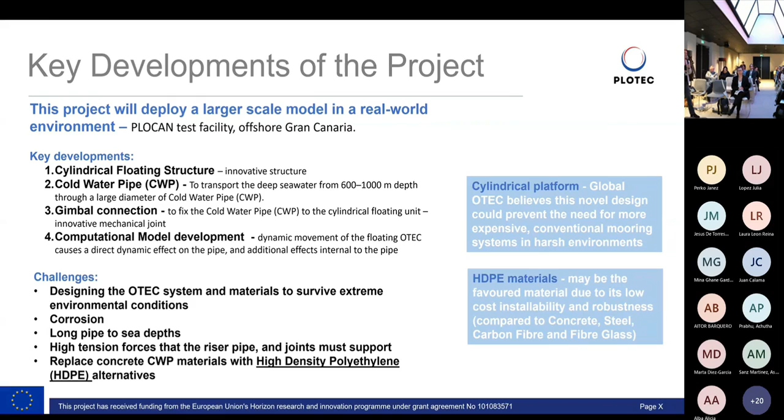So the challenge here is to design the OTEC systems and materials to survive the extreme environmental conditions, corrosion, how to prevent corrosion, the long pipe to sea depths, how to fabricate this component and to be sure that it is more economic than other materials, and to do the modeling of the high tension forces that the riser pipe and joints must support. And this, in particular, for the high-density polyethylene alternative solution that will be used in this project.

We will also look to the socio-technological perspective, as we heard in the presentation from UCC. This is also a very relevant issue in this project because OTEC is not very known. When we talk about floating solar, everybody understands what it is because they know the solar panels on land, so it's transported to the ocean in a floating structure. It's easy to explain. When you go for OTEC, you always need a drawing and you need some vocabulary that is not common to citizens in general. So it's difficult to understand how much work has already been done on OTEC in the past and the full potential of this technology. And so we need to advance the societal readiness in this project and to balance this with the OTEC technology development.

There is also competition for the marine space. We know it's growing, so we need to do research on how to co-locate these structures with other renewables. For instance, installing solar panels on the top of this plant could maybe be a solution. Environmental impacts in general, there are some open questions because there are not many plants of this type, so there is research that has to be done to understand what could be the negative impacts and what are also the positive impacts. And multi-use of OTEC, I already mentioned it, and how this is connected to LCOE cost models.

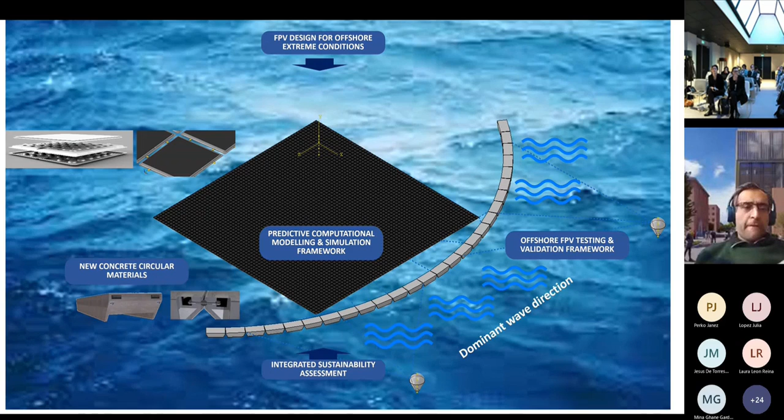The black square that you see is a field of floating PV modules. These are very lightweight structures, as you see in the top left, aluminum plates floating on the water surface. And we know that these are quite fragile and very light, so it will be challenging for those modules to withstand the harsh conditions offshore. So our coping mechanism is to develop a ring of concrete pontoons, so-called floating breakwaters. The idea is to attenuate the wave energy and to create a shelter for the floating PV field.

So this summarizes the objective. We want to develop this floating PV field consisting of the PV modules itself, but also this concrete breakwater ring, and also to develop the mooring and all the connections to make it feasible. And same to you, below summarizes the environmental conditions laid out in the EU call. In our project, we have defined 3 field sites in the Baltic Sea, the Mediterranean Sea, and the North Sea, and we try to develop the concept for these 3 field sites.

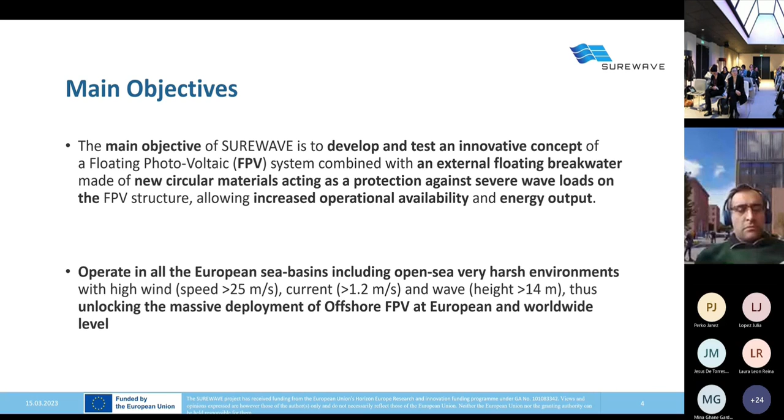We have defined 7 specific technical objectives in the proposal, and we'll just go through them one by one. It's really just a global idea of what we are doing. The first technical objective is on the concept itself, so the PV in combination with the breakwaters. Here at the right, you see again this PV panel. This is an aluminum plate with very low draft, so it's really floating directly on the water surface.

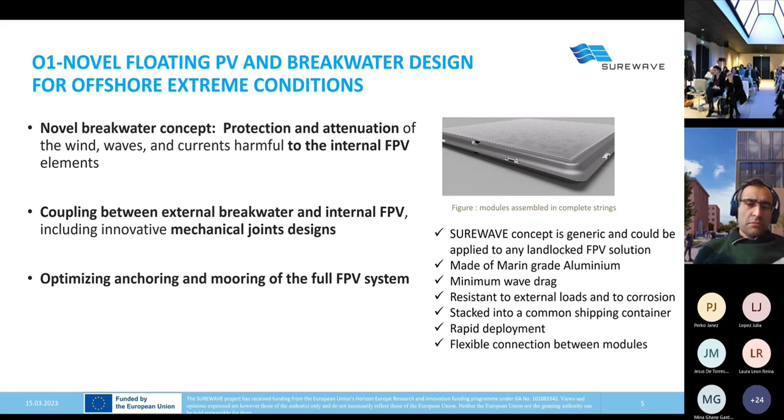Critical topics in this objective will be to develop the coupling between the floating modules, like the hinges between the modules themselves, and also mooring connections, to really keep the combined system in place. The PV modules are being developed by our partner NaturSea, a small company in Trondheim, Norway. Their design is being tested at the moment for inland conditions, so through this project they want to scale up to offshore environments. They've already done some tests in Norway last year, so those are also data that we will use in our project.

The second objective is on the integration of circular concrete materials. This is led by partners in Spain, so Acciona and Said. Their objective is to see how we can make these floating breakwaters, which is a proven technology, more sustainable by using new concrete solutions, specifically also looking at the durability of the concrete. So I think this is very similar to what you are doing in your project.

One of the things that we will do in this project is to also look at corrosion and biofouling in seas. So there's a test site in Spain where we can deploy chunks of concrete, expose them for long durations, so let's say for 12 months, and then see what happens in terms of degrading and biofouling.

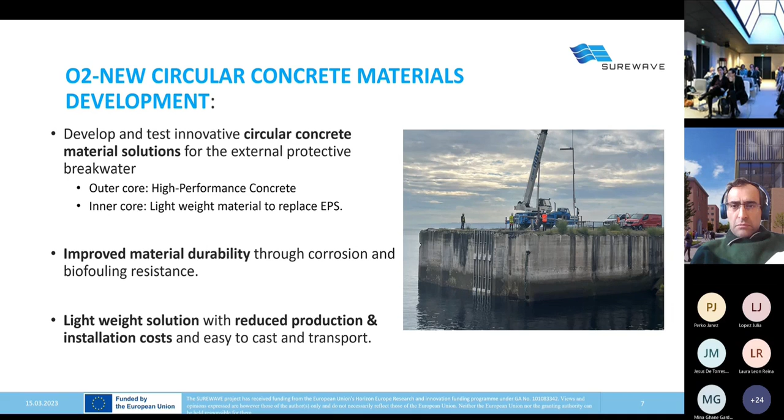Other types of computational modeling will be structural models, so finite element techniques, for instance. We'll also use artificial neural network techniques for the concrete. I don't know anything about this, but I think it was similar to what TU Darmstadt was having in mind, or at least the term was dropped.

And one thing that we will develop is a structural health monitoring system. So this will be like an application on a smartphone that can be used for maintenance. So you would go into the field and then use your application to identify cracks in the concrete.

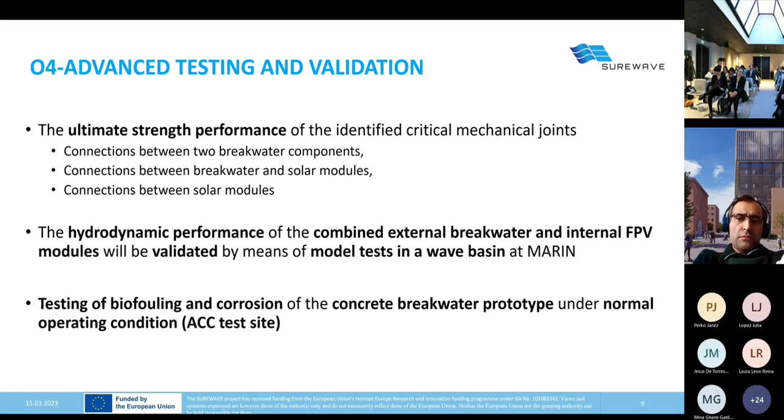Similar to your project, we will also perform wave basin tests at MARIN to see the motions in waves and to obtain data for numerical model validation and tuning. And like I mentioned, we will perform these tests in Spain to evaluate the biofouling and corrosion of the concrete. So this together summarizes the engineering scope.

And with that, we proceed with also looking into other aspects, also quite similar to what you are doing in your project. We will look at LCAs, not only a regular LCA, but also a social sustainability assessment, which, as I understood it, means also looking into the stakes of different stakeholders and seeing how you can involve local companies in your supply chain.

And our plan is to build a stakeholder board with different representatives from different fields and gather their input on the design and see how we can use their input to improve it.

And then finally, last but not least, is the economic impact. So the ambition is that we strive for a levelized cost of energy of around 54 euros a megawatt hour. This was the text that was in the project plan. And with that, we hope to be competitive with other sources of offshore renewable energy. Also, with the smartphone app, for instance, we anticipate that the investment risk will be reduced and maintenance will be cheaper in the end.

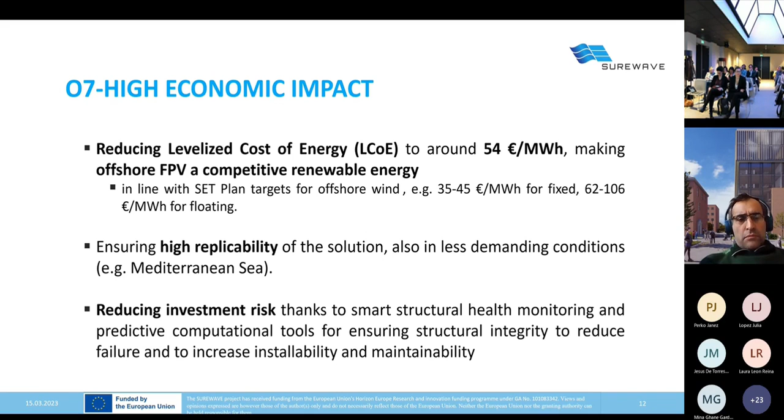So this, very globally, is our project. And just summarizing, in the end it will lead to this design with this floating PV field and the breakwaters. The innovation mostly is in the breakwater concept, the use of new sustainable concrete, and development of new computational modeling tools.

If you have any questions, please feel free to ask now, or you can always also approach our project coordinator or our press and marketing officer from NaturSea. So thanks.

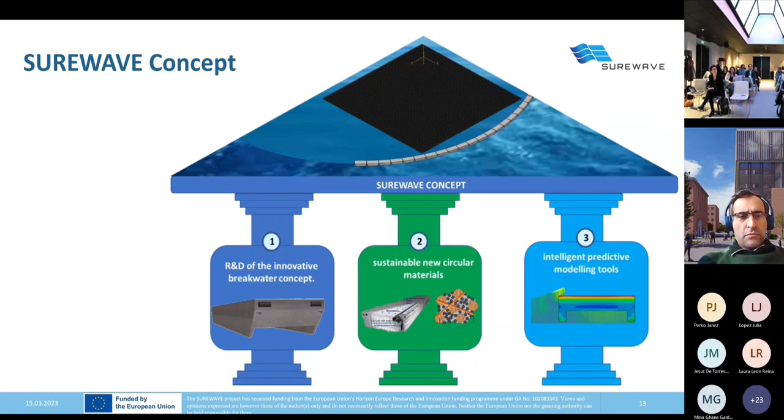We have a question. Hello, thank you for the presentation. If I understood correctly, your panels float themselves. I mean, you have a grid of panels which sustain their own weight? Yeah, that's correct. One of the main problems of the two or three offshore tests that have been done with floating solar is the algae and all the biofouling that appears on the surface of the panels because they are very close to the water. So how are you planning to avoid this?

Yeah, thanks. That's an excellent question. We are well aware of that. The biofouling will be very important to take into consideration. We've actually seen that according to the DNV guidelines that have been very recently launched for floating PV, we have to take into account 6 centimeters of biofouling. For these modules, it will mean that the weight increases by a factor of 5. So it's really something that should be considered.

In fact, we think that the situation without biofouling is, in our case, not relevant. We have to assume the governing case will be with 6 centimeters biofouling. So that's what we will assume. But we will rely mostly on what's known in literature and being presented by the guidelines. It's not a topic that we will investigate ourselves in the project. Thanks.

Hi, thank you. Question on the breakwater. What wave conditions do you assume you're going to need? What kind of reduction do you think you're going to need for the panels? And how does it affect the dimensions of the breakwater? I can imagine that at some point they need to get quite large depending on the location and the condition.